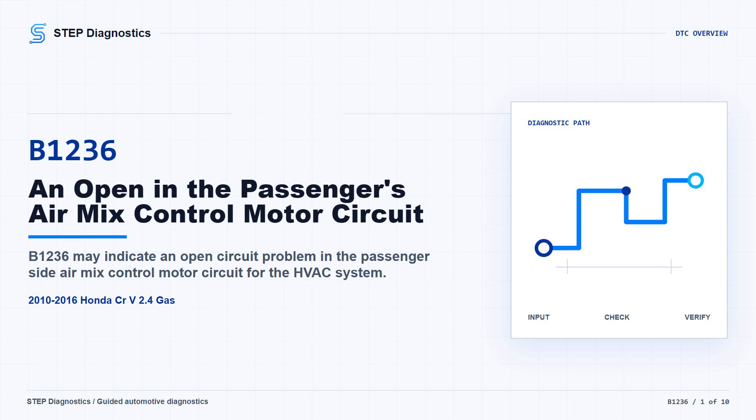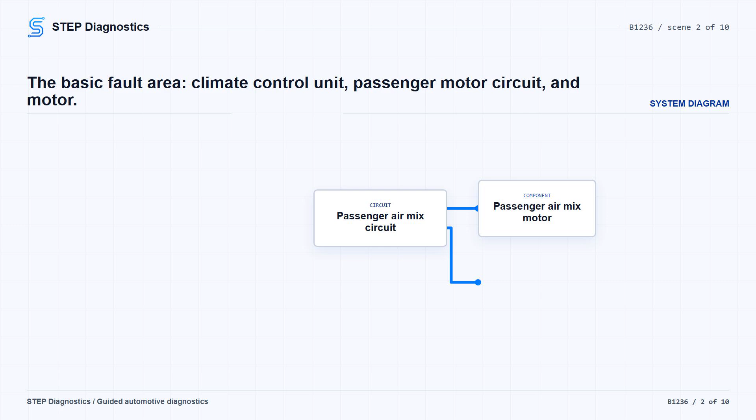B1236 points to an open in the passenger side air mix control motor circuit. In plain terms, the climate control unit may be losing the position signal or circuit connection it expects from the passenger air mix door motor. The customer may notice the passenger side temperature does not respond correctly, or the HVAC may set the code during its self-check. The broad possible fault areas are the passenger air mix control motor circuit, the wiring and connector between that motor and the climate control unit, the motor itself, or the climate control unit.

Start by proving the code is active before getting into circuit checks. First, clear the code with the HDS. Turn the vehicle to OFF, then back to on. Run the HVAC self-diagnostic with either the HDS or the climate control unit, then check for codes.

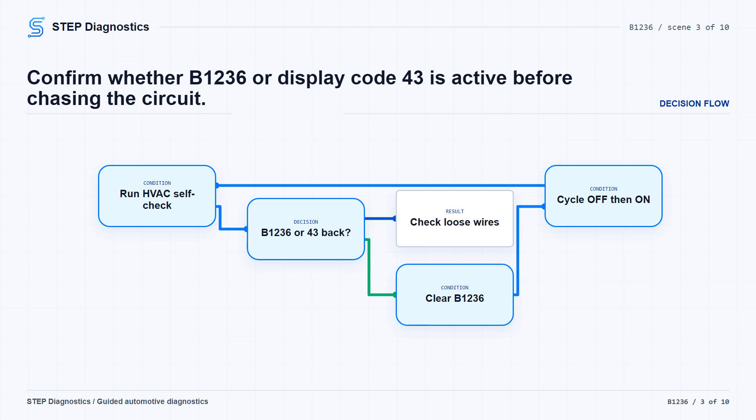If B1236 or the matching display code 43 comes right back, continue to the circuit checks. If it does not return, treat it as an intermittent. At that point, concentrate on loose wires or poor connections in the passenger air mix control motor circuit, instead of forcing a hard fault diagnosis that is not present right now.

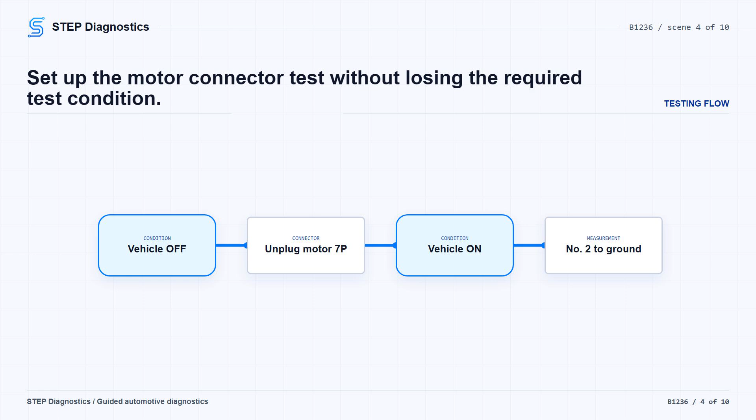With the code confirmed, turn the vehicle OFF and disconnect the passenger air mix control motor 7P connector. Turn the vehicle back on. Measure voltage from terminal No. 2 at that disconnected 7P connector to body ground. You are looking for about 5V.

If about 5V is present, that side of the circuit is considered okay, and the next check is the shared sensor return side. If about 5V is not present, move to the same circuit at the climate control unit connector to see where the open is showing up.

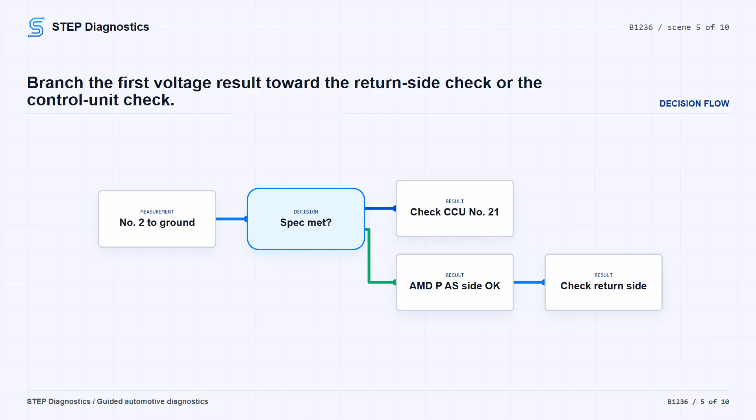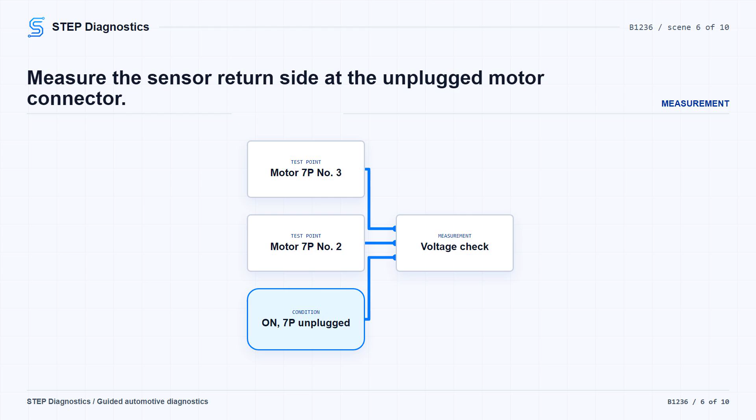Leave the vehicle in on mode and leave the passenger air mix control motor 7P connector disconnected. Now measure between terminal No. 2 and terminal No. 3 at that same motor connector. Again, the expected reading is about 5V. If about 5V is present here, the sensor COM side of the circuit is okay, and the diagnostic path calls for replacing the passenger air mix control motor.

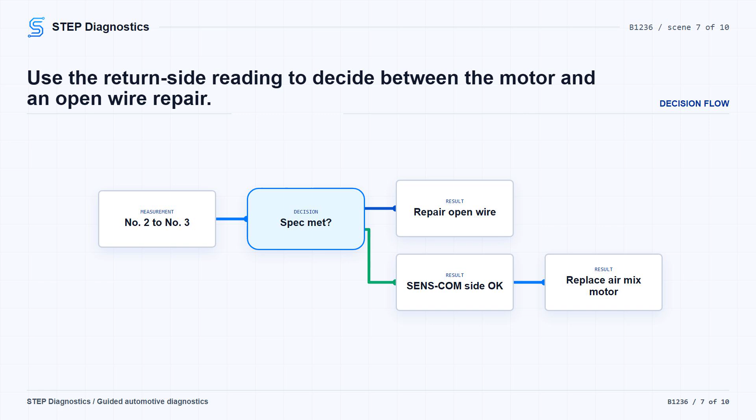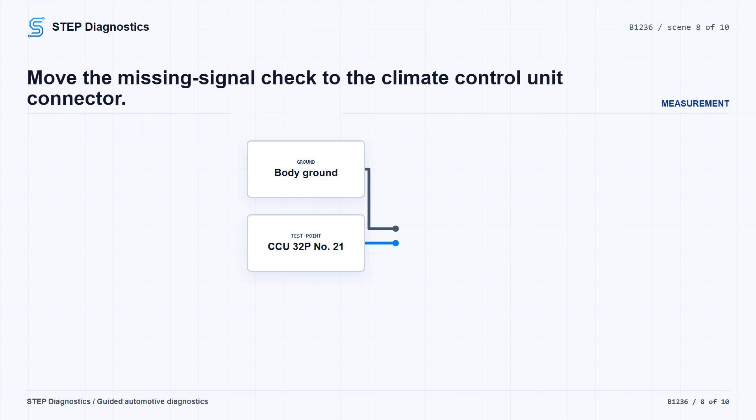If about 5V is not present, repair the open in the wire between the climate control unit and the passenger air mix control motor. If the first motor connector check did not show about 5V, keep the vehicle on and keep the passenger air mix control motor connector disconnected. Measure voltage from climate control unit 32P connector terminal No. 21 to body ground. The expected value is still about 5V.

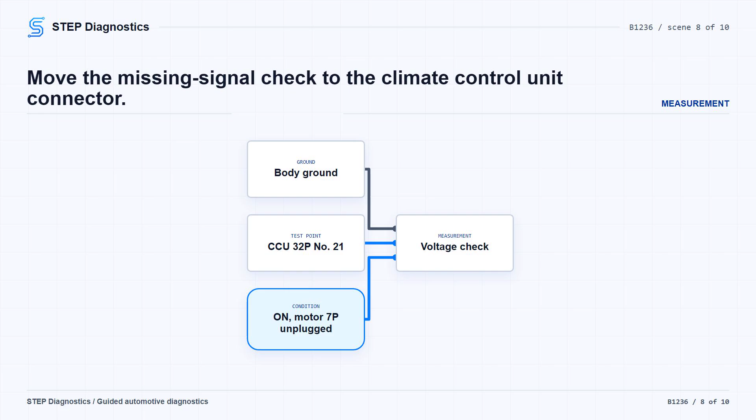If about 5V is present at the climate control unit but not at the motor connector, repair the open in the wire between the climate control unit and the passenger air mix control motor. If about 5V is not present at the climate control unit, the AMD P AS side is considered okay by this path, and the diagnostic result is to replace the climate control unit.

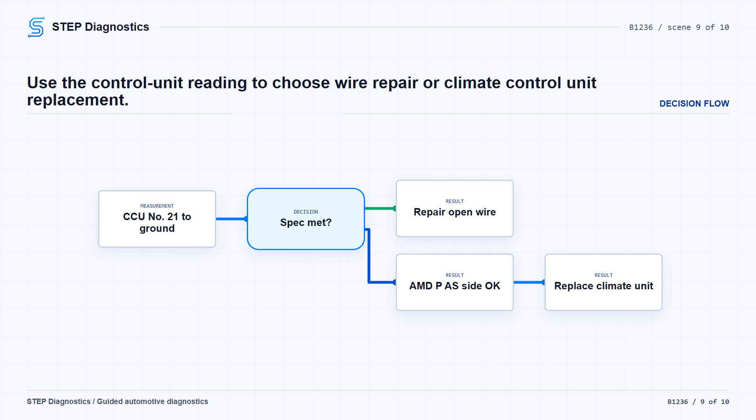Keep the confirmation separate from the pinpoint checks. Use the same self-diagnostic routine from the beginning. Clear the code, cycle the vehicle OFF and on, run the HVAC self-check, and confirm B1236 does not come back.

The key on this one is not to guess at the motor or the control unit. Prove whether the about 5V circuit is present at the motor, prove the return side, and only then follow the branch the test results give you.